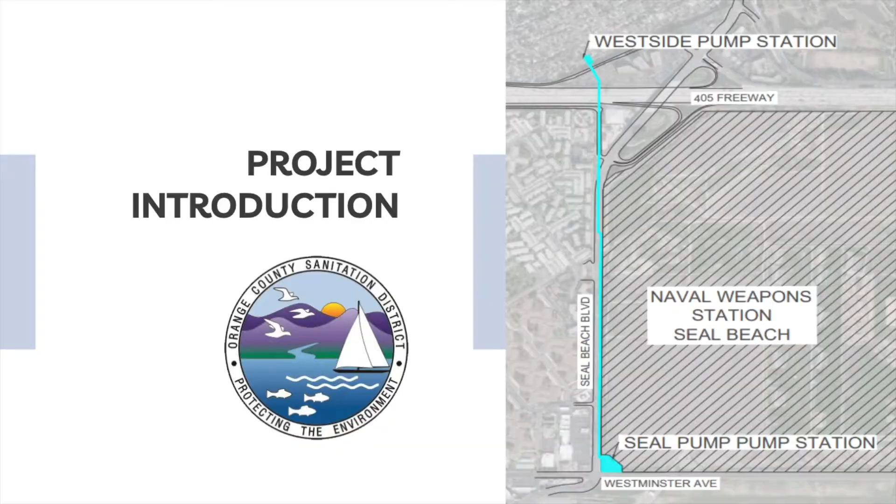So the whole goal of this project is to design a new pump station that replaces the existing Seal Beach pump station and the Westside pump station. Also, we've been challenged with the goal of designing a dual wet well system built at different elevations, meaning one wet well would be higher than the other. Our goal is to identify the benefits of having these two wet wells like this and to see whether or not it would run more efficiently or it would reduce costs.

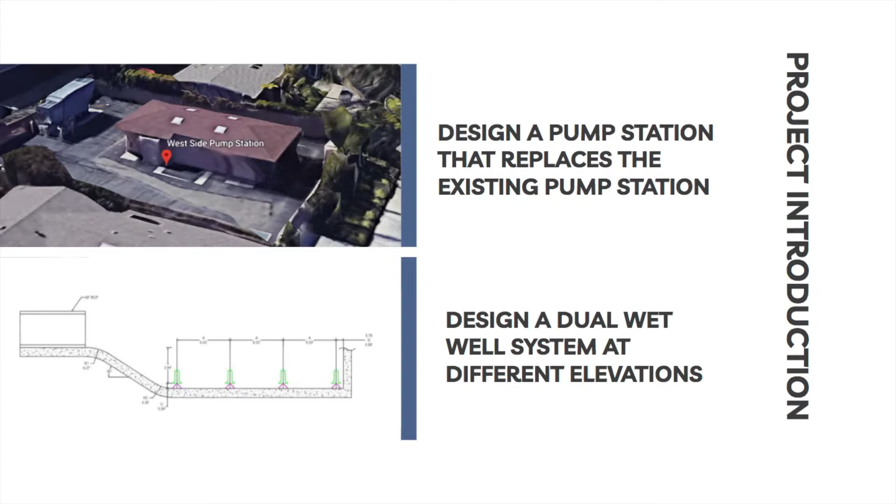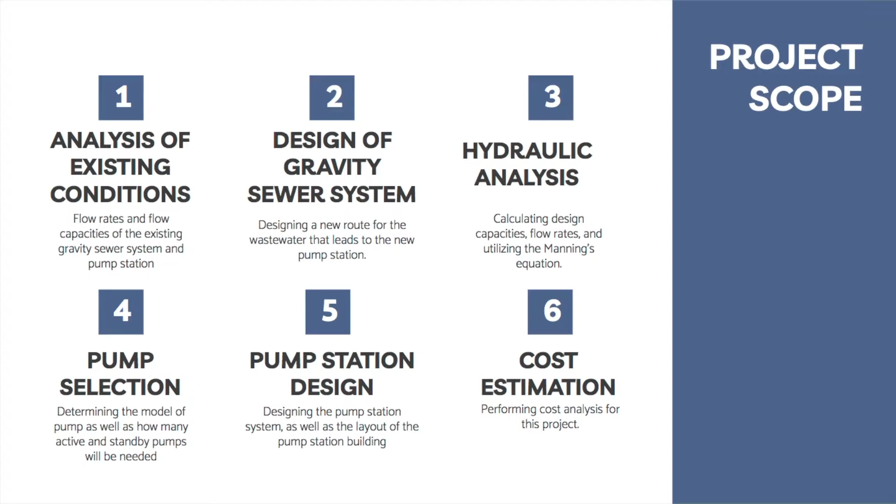So our project scope includes 6 main steps. The first step is to analyze the existing conditions regarding the existing pump stations, peak flows, and the configuration of the existing gravity sewer system. Step 2 is to design a new gravity sewer system connecting the existing pipe to the new pump station. 3 is to perform hydraulic analysis to make sure that our system will run efficiently and smoothly. 4 is to select pumps for our pump station. 5 is to design the pump station itself. And 6 is to calculate out cost estimates for the whole project.

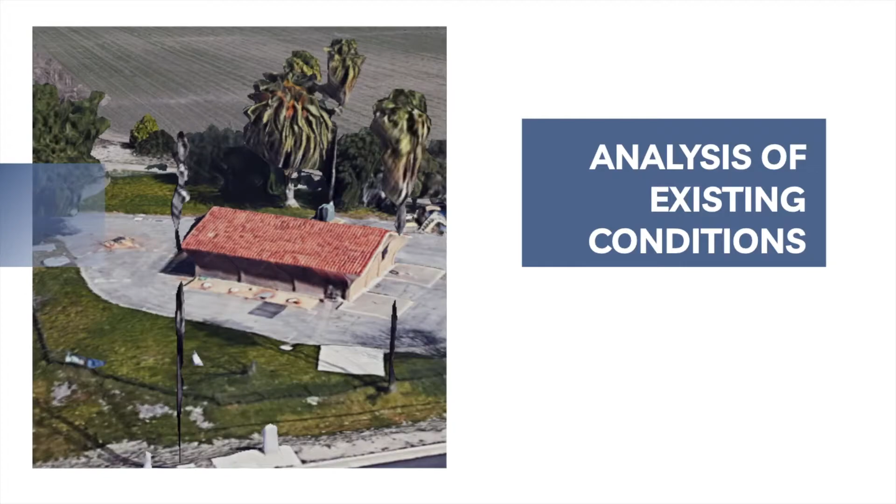The first task was to analyze the existing conditions of the gravity sewer and pump stations. When analyzing the existing conditions for the gravity sewer and pump station, we had to check that the values given to us by OCSD matched up with the record data. This included the peak flow rates, the pipe segments in the existing gravity sewer, the flow capacity, and to compare the original designs with current OCSD standards. Some of the constraints for this project include meeting minimum and maximum velocity requirements for the wastewater flow rate, choosing appropriate dimensions for the designs, as well as staying within OCSD property lines.

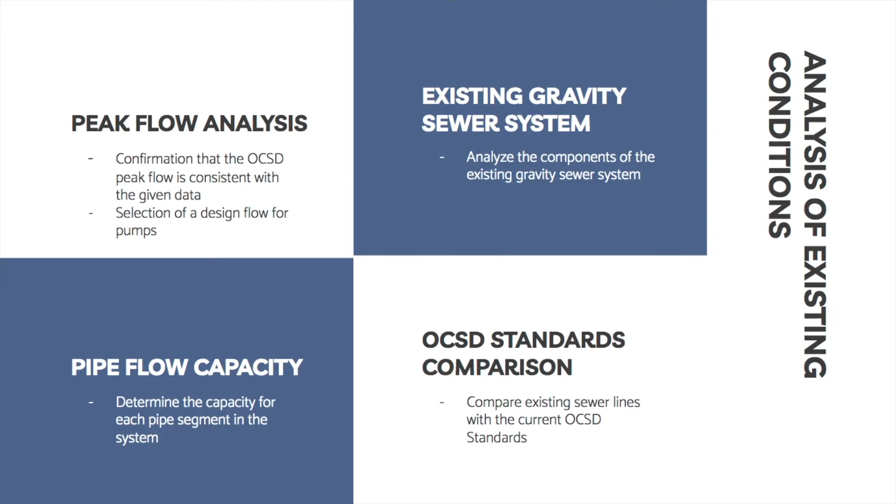The first step was to validate the peak flow rate given by OCSD. To do this, we were given existing flow data during a month of heavy rain, and using Excel, the average flow rate for each hour was found by averaging the data and moving along in increments of 1 minute. These values were then averaged again to find the largest daily flow rate, and this value was then compared to the flow rate that OCSD provided us. The maximum flow rate we found from the data was 34 million gallons per day, MGD, which was larger than the 32.5 MGD given by OCSD. As a result, the design of the gravity sewer line and pump stations would be based on the larger 34 MGD.

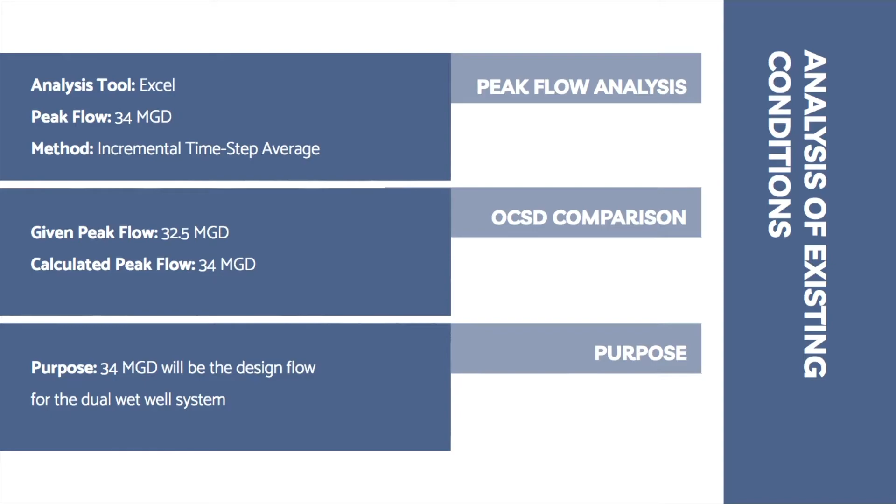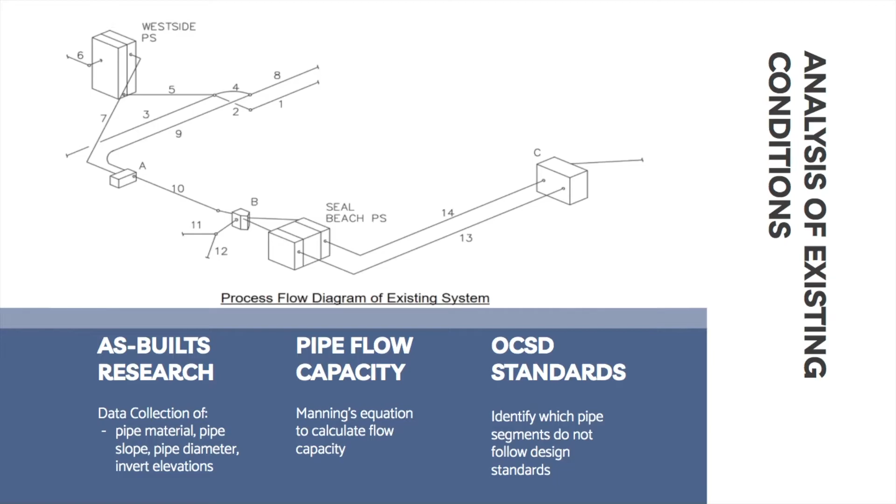Next, we will move on and talk about the steps involved in the design of the new gravity sewer line. Some factors considered when designing the gravity sewer include the routing of the flow, velocity requirements, configuration of the gravity sewer, and the cost of the project. For the pump station, 2 different setups were considered, a single wet well or dual wet wells. Our client, OCSD, asked us to look into potential designs that utilize a dual wet well where each wet well is at a different elevation.

When determining the flow route for the gravity sewer, we had to look at the OCSD property lines and existing utility pipes and determine a location for the new pump station. The ideal fluid velocity range for this gravity sewer is between 2 and 4 feet per second to pick up and move solids, and an absolute maximum velocity of 10 feet per second to ensure safety during maintenance.

For the configuration of the gravity sewer, we looked at the existing pipes and matched up the inverts and water surface levels of the proposed pipes to maintain steady flow when the fluid is transferred from one pipe to the next. A final criterion that was considered throughout the entire design process was to minimize the costs. This was taken into account by minimizing pipe costs, reducing the amount of earthwork, and choosing optimal pumps for the required amounts of flow.

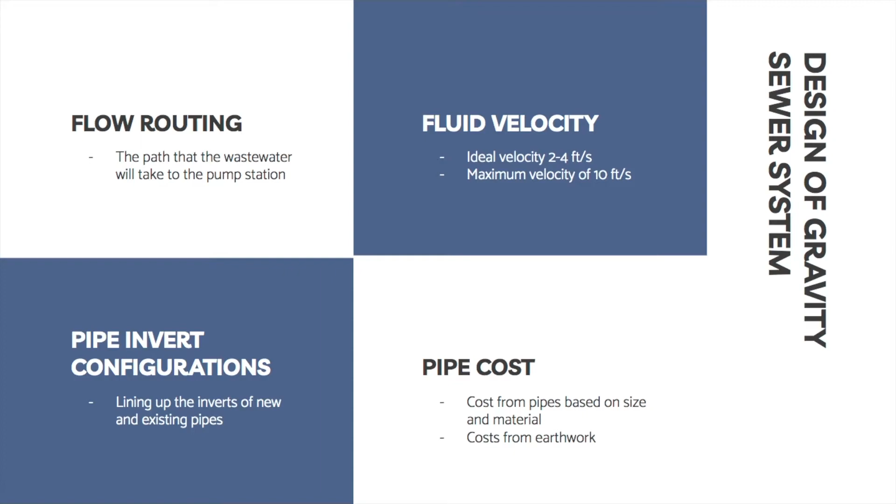The routes considered were having the new pump station on the right side or the left side of the existing pump station, and after looking at the property lines and utility lines, it was decided to have the pump station on the right side.

After creating this layout, we calculated the flow rates for each pipe using existing record flows that were provided, and using our calculated flow rates and the Manning's equation, we were able to test different slope and diameter combinations to find optimal pipe dimensions that met all of the standards, requirements, and minimized the costs.

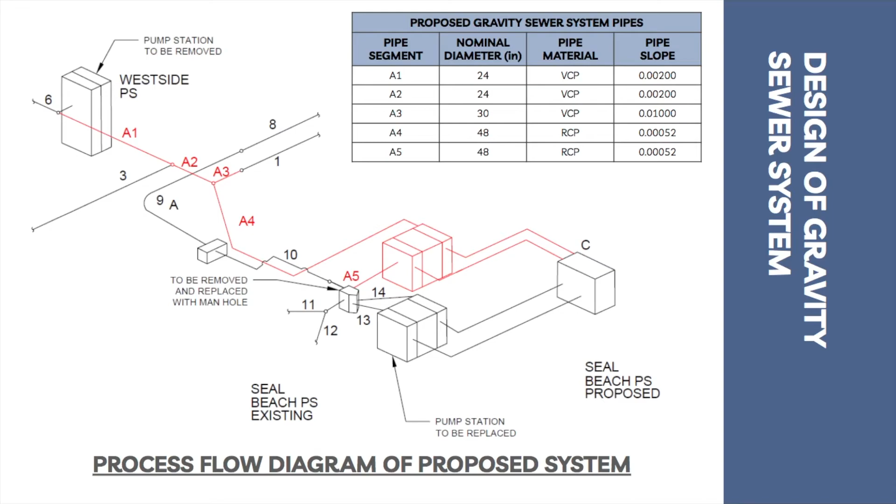Alright, so in case you forgot, my name is Jason, and I'll be getting into more details about our pump station design, our pump selection, and our hydraulic analysis.

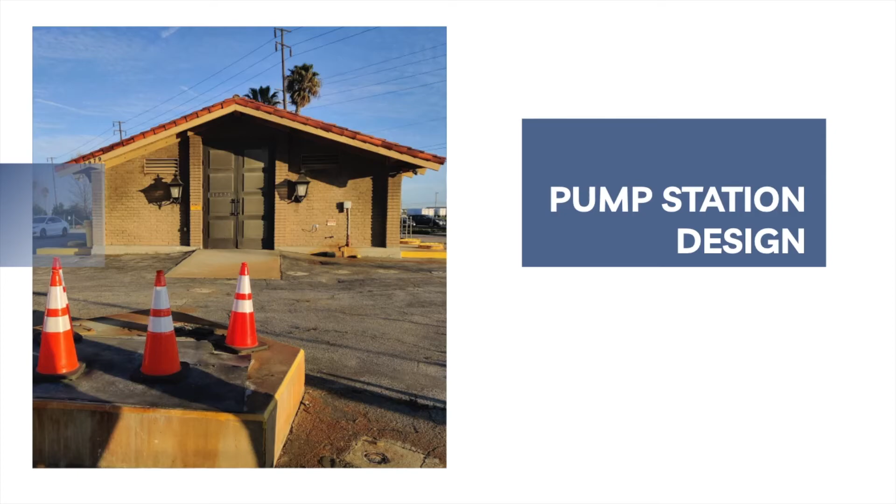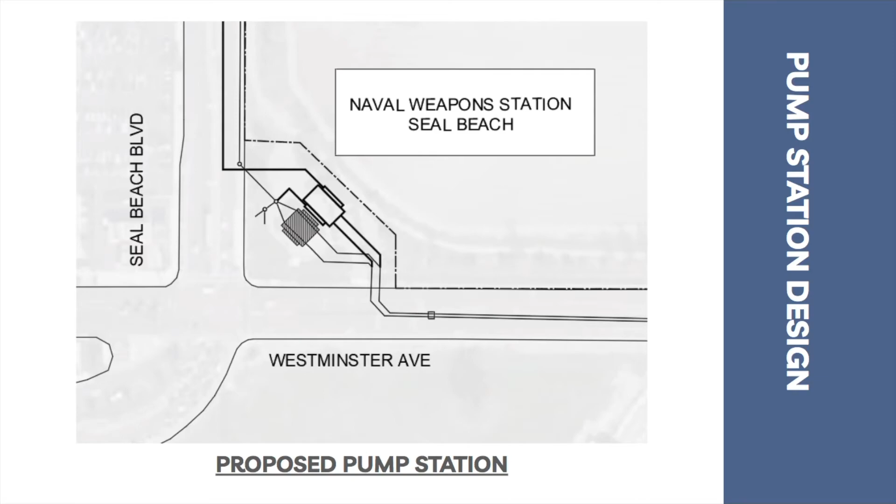Our design includes blind flanges and isolation valves near the meter runs and the force mains. This is to allow OCSD to use a bypass in the case where emergency pumping is needed if there's too much sewage flow, or if maintenance is required, such as replacing that meter run.

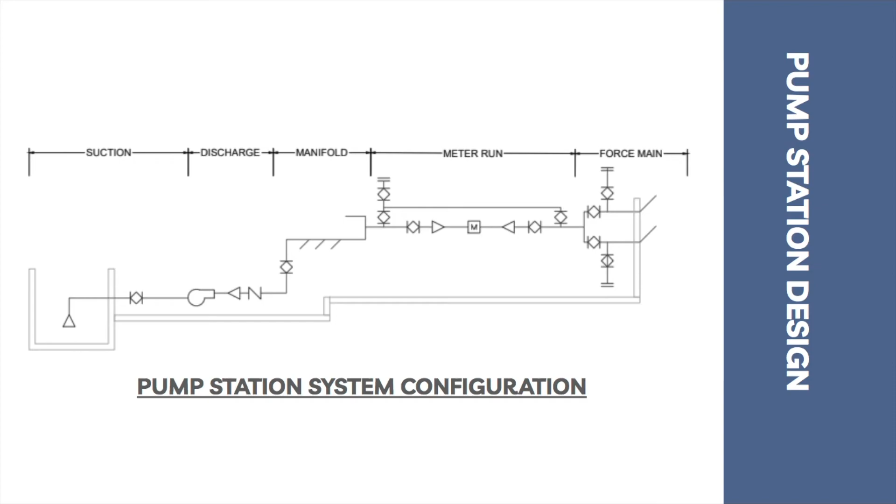Our layout for the proposed pump station is slightly larger than the existing Seal Beach pump station, but that's mainly to accommodate larger wet wells and a higher peak flow. That's the reason why we're replacing this pump station, because the current one can't run efficiently because of an increase in the peak flow.

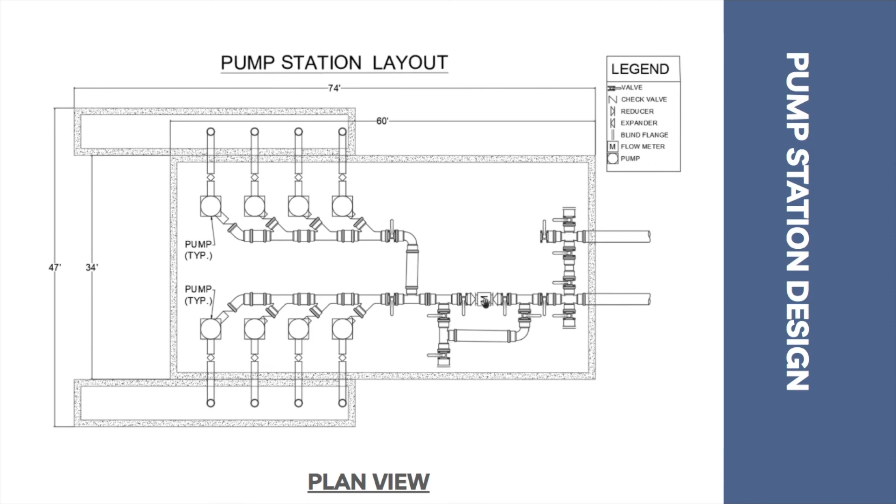We used the design guidelines of OCSD and the Hydraulic Institute's pump intake standards to determine the required dimensions of the wet wells. We took into account the design flow, the discharge velocity, and the suction inlet diameter to determine that a 40 feet long and 5 feet wide wet well will meet our design requirements.

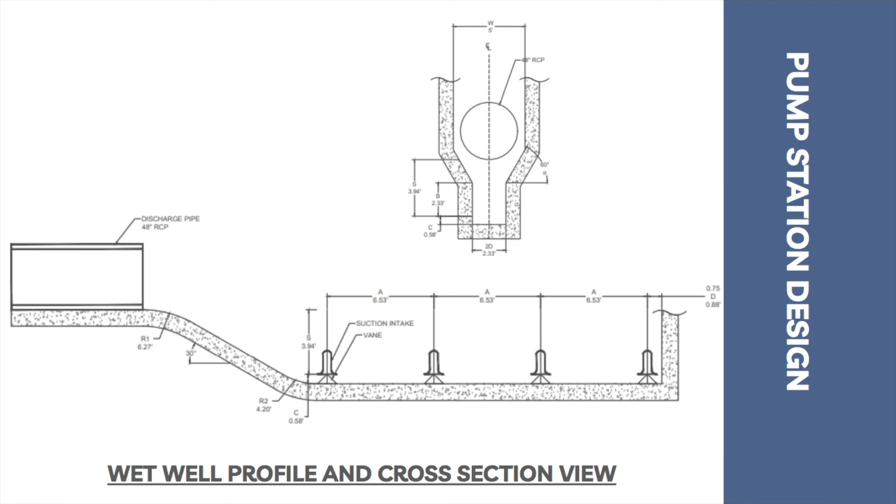So next is our pump selection. The reason we decided to discuss which pump we selected first is because we did our hydraulic calculations in an iterative approach. We looked at various pump models and did calculations for each of them to see what worked and didn't work. I'll be getting more into details about that in a few more slides.